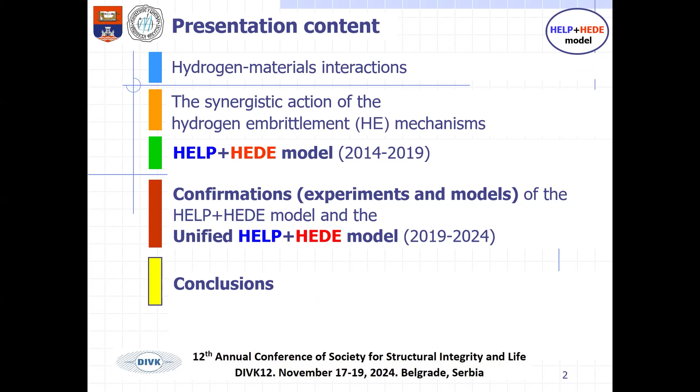So the HELP plus HEDE model is the main topic, and we will talk about synergy of mechanisms of hydrogen embrittlement in metallic materials. Presentation content: briefly about the problem. Then I will present the initial HELP plus HEDE model proposed by a group of researchers from Serbia in 2014 and 15. And then I will present the new results regarding confirmation, experiments, and models of the so-called unified HELP plus HEDE model. And then finally some conclusions.

Here is the overview from our review paper from 2019 about what should be done and what's the problem related to hydrogen materials interaction, generally speaking. We have four topics. One is phenomenology of hydrogen-related degradation, which is an extremely complex topic. The other problem, particularly related to hydrogen new technology and transportation of hydrogen mixture with gases or pure hydrogen in pre-existing pipelines, is hydrogen entry and source, how hydrogen enters into material. And finally, what is missing right now is a structure integrity model and predictive maintenance model to check how materials will behave under hydrogen embrittlement.

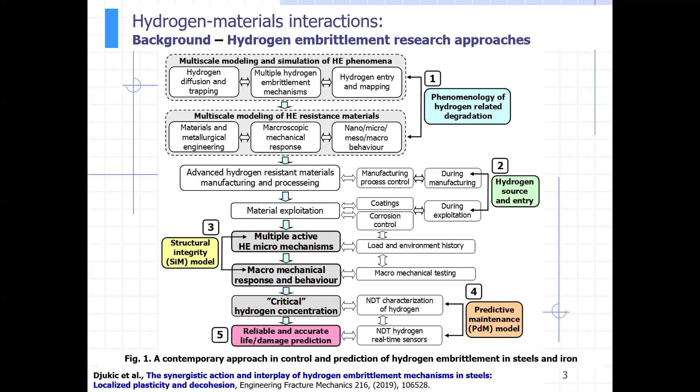And we proposed in 2015 a structure integrity model based on multiple active hydrogen embrittlement micro mechanisms, based on measuring and following the change of hydrogen concentration in material, based on critical hydrogen concentration. And we are still working on a so-called unified predictive structure integrity model for prediction of behavior of material exposed to various hydrogen damage mechanisms.

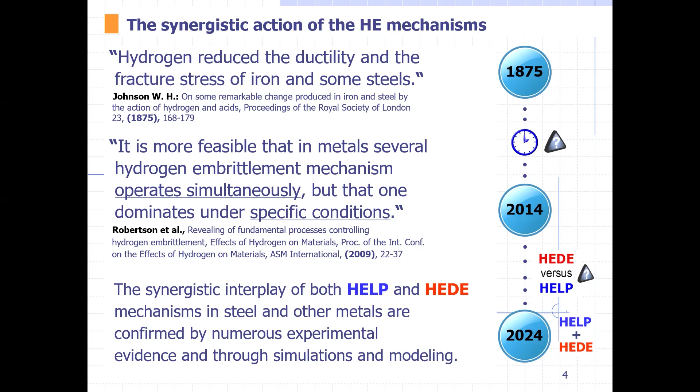Hydrogen is an old topic. In 1875, hydrogen reduced the ductility, Dr. Johnson, famous paper. Then we have in 2009 a paper by Professor Robertson from the US, which pointed out that several mechanisms of hydrogen embrittlement operate simultaneously. And then we proposed the HELP plus HEDE model as one of the options for synergy. So we can say nowadays that the synergistic interplay of various plasticity-mediated hydrogen embrittlement mechanisms, including HELP and the decohesion mechanism HEDE, are confirmed by numerous experimental evidence and through simulation and modeling.

So we have two models for the synergy, and here is the difference. The HELP plus HEDE model proposed in 2014 and 15 pointed out that multiple plasticity enhanced hydrogen embrittlement mechanisms, HELP, but also others, there are various mechanisms, together with the decohesion mechanism, are responsible for hydrogen embrittlement in steel. And recently it is confirmed that this model is applicable to almost all metallic materials.

That is the difference from the so-called HELP-mediated decohesion model proposed by a group from Urbana-Champaign, Professor Robertson and Sofronis, which pointed out that initial activity of some plasticity-mediated mechanism, particularly HELP, is a prerequisite for eventual activation of decohesion as a final failure mechanism. And we show that it's not always the case, particularly at a very high concentration, higher than the critical hydrogen concentration.

So the HELP HEDE model is a comprehensive concept on which several teams, as I presented, now work worldwide to confirm as a unified theory about hydrogen embrittlement in metallic materials. So HELP and other plasticity mechanisms together with HEDE synergistically are operative. And this HELP HEDE model is based on very careful microstructural mapping of the dominant hydrogen embrittlement mechanism depending on hydrogen concentration, microstructural characteristics of material, and stress strain state of the material in order to reveal the various hydrogen-assisted fracture modes after failure.

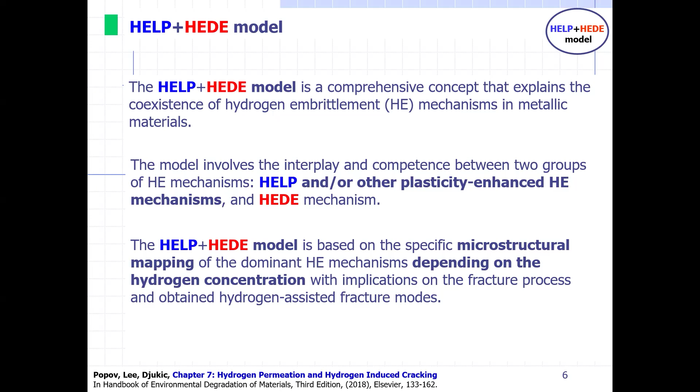So the HELP HEDE model is confirmed in iron, in almost all types of steel, including low carbon steel, high strength steel, martensitic steels, pipeline steel, but recently it is also applied and confirmed that it's operative in nickel-based alloys, aluminum alloys, high entropy alloys, and additively manufactured alloys. So I will give you some new results.

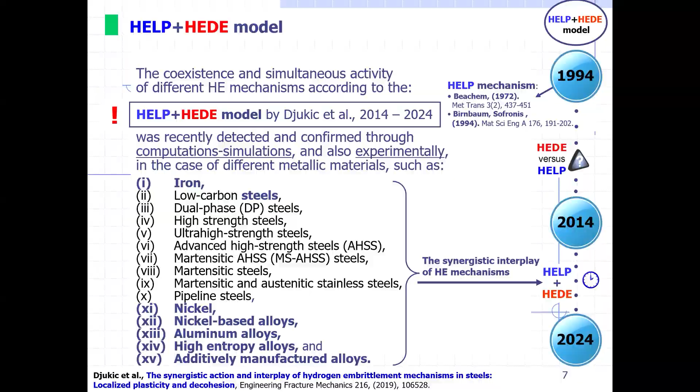Here is the original paper from 2015 in which we proposed the HELP HEDE model. We can see that we have a transition between mechanisms, and the drop of mechanical property, which means particularly ductility, happens not due to hydrogen-enhanced plasticity mechanisms, but due to activation and predominance of the HEDE mechanism, decohesion mechanism. So we have a HELP dominant regime and a HEDE dominant regime, and which is interesting, the fracture features of the low ductility sample and the relatively good ductility sample are very similar. So we have activity of both mechanisms, manifested by microvoid coalescence, a ductile mechanism due to predominance of HELP and other plasticity-mediated mechanisms.

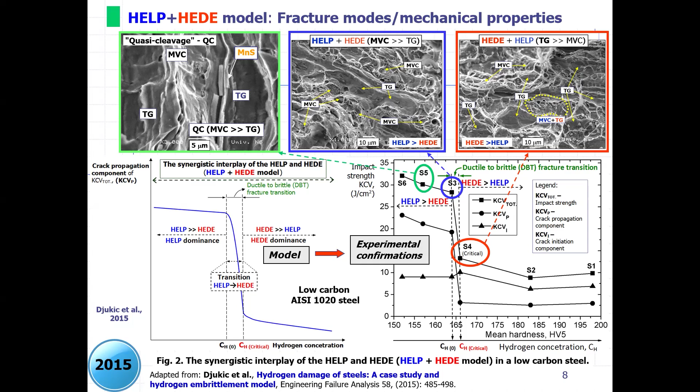And then after accumulation, we propose the local HEDE micro concept, which tells us that when we have accumulation of large enough decohesion incidents, we still have remaining ductility in the material, but we have a predominance of transgranular failed area, and after that intergranular, we have a very sharp drop in mechanical properties, which means a drop in ductility, which finally provokes hydrogen-assisted crack initiation and propagation, and that's the basis of the HELP HEDE model.

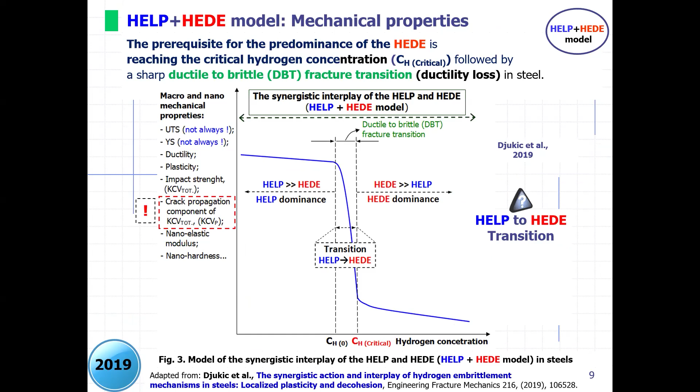So here is the overview of the transition: HEDE dominance, HELP dominance, and we are working on mapping of conditions for activation and predominance of a particular mechanism of hydrogen embrittlement depending on the microstructure characteristics, global and local hydrogen concentration, and stress-strain level.

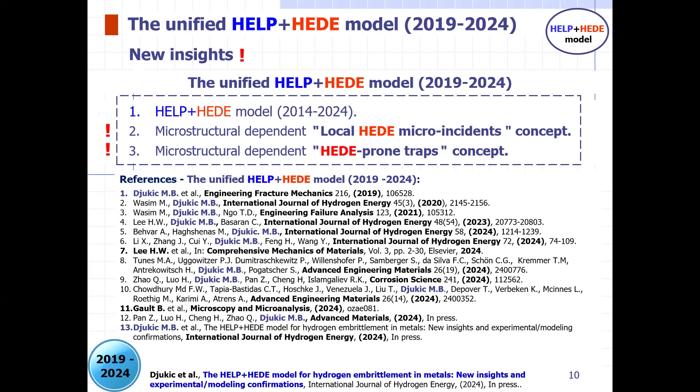And we will talk about the HELP HEDE model. I will present two new concepts, the local HEDE microincident concept proposed in 2019, and the totally fresh and new HEDE-prone concept, which talks about the transition between mechanisms. So here is the overview about critical hydrogen concentration, HEDE dominance, HELP-mediated HEDE, and other plasticity-mediated mechanisms.

As you can see, we can divide, depending on the global hydrogen concentration, the behavior of material into two categories. We have so-called plasticity-mediated fracture modes due to effects of hydrogen, and on the other side, we have pure embrittlement of material, which means decohesion-controlled fracture mode, in which case, which is very interesting and very enigmatic to understand, hydrogen promotes the plasticity of steel and other materials at low hydrogen concentration, so it increases the plasticity of metal.

And after that, it sharply decreases, and that transition is more important. So in the case of HEDE predominance, we have so-called hydrogen-impeded plasticity of material, and we must carefully investigate when that happens in our material.

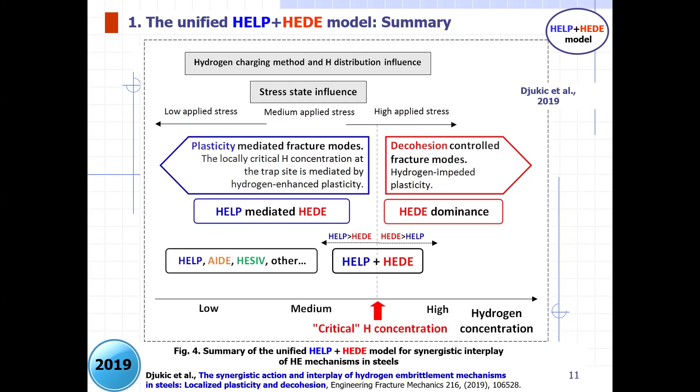So here is the microincident concept, proposed in 2021 with a group of researchers from Australia and Serbia, which tells us that even at a low critical hydrogen concentration, we have localized decohesion phenomena on the microscopic level. It's the so-called HEDE microincident concept.

And in the case of activity of the HELP mechanism and other plasticity mechanisms, we have so-called non-HELP-mediated HEDE, which means that we have a full predominance of the decohesion mechanism after accumulation of large enough local micro HEDE incidents. And in that case, we have HEDE dominance. So we have both plasticity-mediated fracture and local intergranular and transgranular brittle failure due to the HEDE mechanism. So they operate simultaneously.

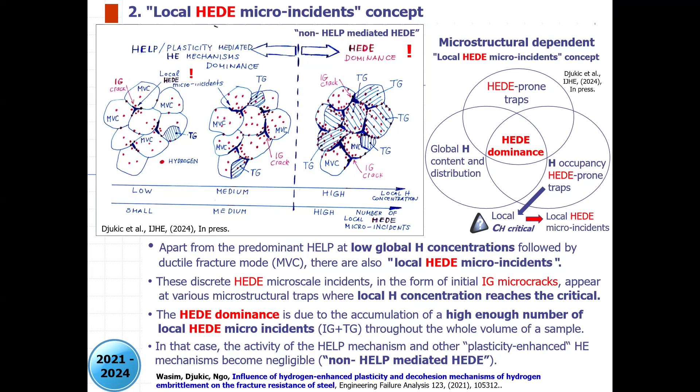After that, here is the overview of local HEDE microincidents, which means that we have initiation of the HEDE mechanism even in the case of relatively low hydrogen concentration in the material, and after accumulation of large enough HEDE microincidents, we have, microscopically speaking, the transition from ductile behavior of material to pure embrittlement, which means a sharp drop of ductility of material after accumulation of that mechanism.

But this is a continuous process, and we must map and investigate when HELP and other plasticity-mediated mechanisms are predominant and when we have a transition to the decohesion HEDE mechanism. I don't have time to explain the HELP and HEDE mechanisms, but they're very well known in the literature.

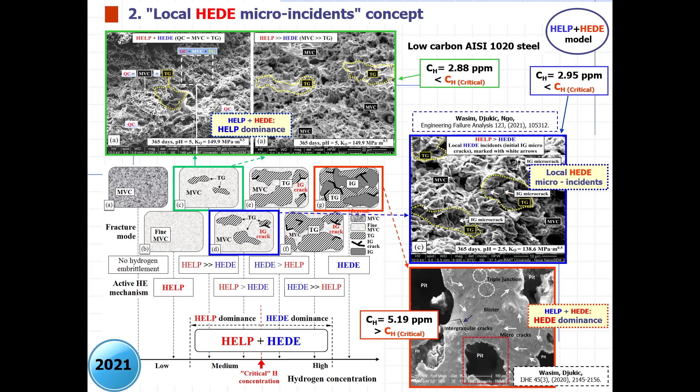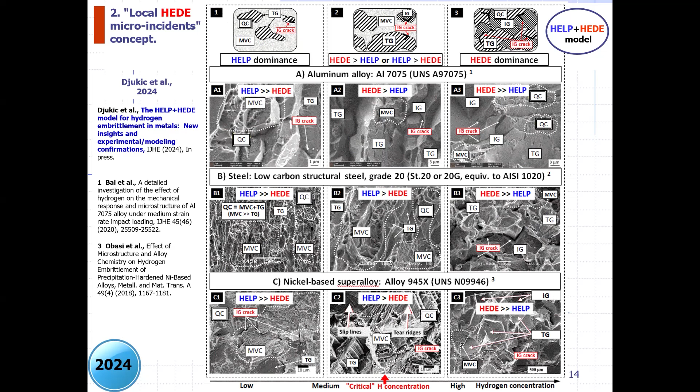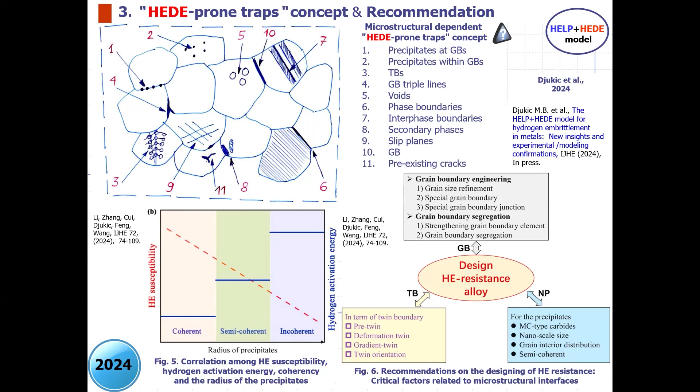So we proposed in our recent paper from 2024 with Chinese authors a design of hydrogen embrittlement resistant alloy based on careful engineering of twin boundaries, precipitates, and boundaries in metallurgical design, in order to ensure that precipitates are particularly good ones, semi-coherent with the matrix. So we must be careful, and on the other slide we will see how high-strength precipitation-hardened high entropy alloys are very prone to hydrogen embrittlement because this schematic is not involved during the design of those particular alloys.

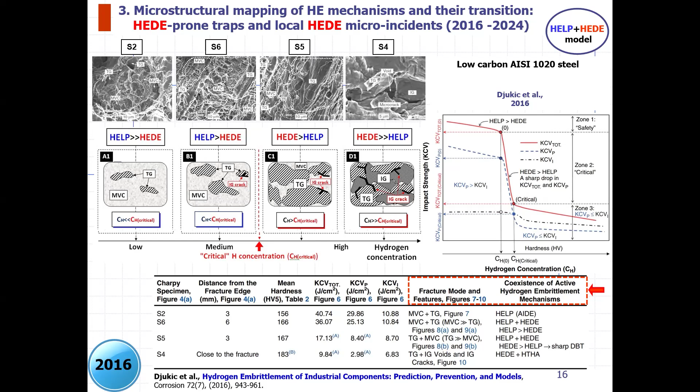This is the structure integrity model. I don't have time to talk about the transition from 2016, published in Corrosion Journal. As you can see, we have a transition of mechanisms, and we have an analysis of critical hydrogen concentration and particularly prone parts of the microstructure. This is the brand new result.

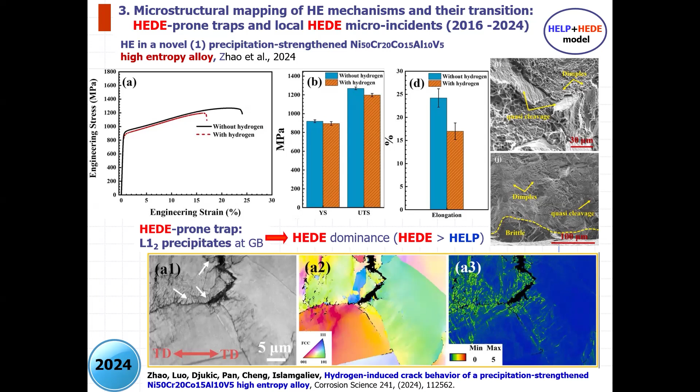And as you can see, we have decohesion and activation of the HEDE mechanism on the grain boundary, which are strengthened by these precipitates. So this particular precipitation strengthening high entropy alloy is very prone to hydrogen embrittlement due to the existence of HEDE-prone precipitates and their location in the microstructure. You must carefully provide the metallurgical engineering of high hydrogen embrittlement resistance alloys. And we show how to do that in nickel-based alloy.

Here is, again, work with a group from China and Serbia. As you can see, we provide a very high resistance of nickel-based alloy. Nickel-based alloys are typically very prone to hydrogen embrittlement. We provide the explanation based on the HELP HEDE unified model of what's happening in this material. But what's very interesting is that we introduce deformation twins and microbands into the microstructure of the novel nickel-based alloy, which, as you can see, provides a combination of decohesion and micro-voids. Micro-voids means that we have remaining ductility of our material.

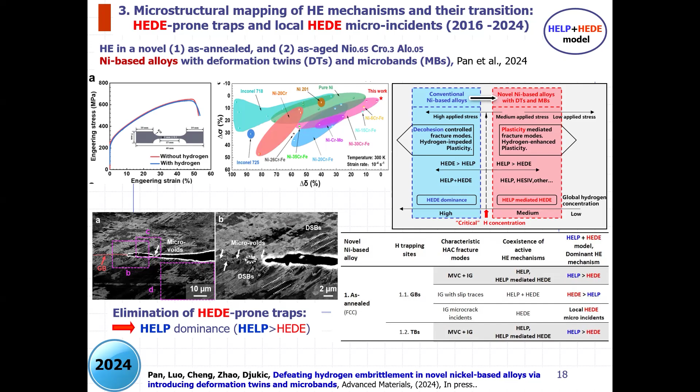So we are in the part where we don't have HEDE dominance, so we shift from conventional nickel-based alloy to novel nickel-based alloy, the active mechanisms below the critical hydrogen concentration. We provide a detailed analysis, as you can see here, in comparison to Inconel 718 and Inconel 725. These are conventional nickel-based alloys as well as other nickel-based alloys. The degree of hydrogen embrittlement susceptibility of this novel alloy developed in China is much lower, and this nickel-based alloy provides very high hydrogen embrittlement resistance. That's the direct approach and confirmation of the micro HEDE incidents and HEDE-prone concept, which I previously explained to you.

One slide more in order to confirm the mechanisms. Together with Professor Basaran from the University of Buffalo and a colleague from China, we provide a very comprehensive paper, in which we tried using unified mechanics theory, which is an entropy-based ab initio method, to confirm the validity of the HELP HEDE model on the physics level, on a fundamental level. And we have some very promising results.

We implemented the HELP HEDE model and transition between mechanisms in the case of high cycle fatigue of pre-hydrogenated material, and confirmed that due to HELP HEDE activity, we have a shortening of fatigue life, as you can see here on the diagram. So the simulated stress versus the number of cycles fatigue curve due to HELP HEDE activity at different hydrogen concentrations confirmed that when we increase the hydrogen concentration, we have a much larger increase in entropy because of the HEDE mechanism, and the lowering of entropy due to the HELP mechanism, which is a direct confirmation of the HELP HEDE model on the ab initio level. Professor Basaran has been working for more than 30 years on unified mechanics theory.

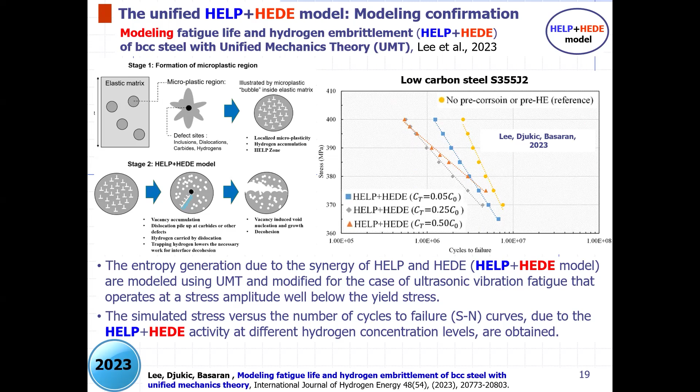So, some of the conclusions. I tried my best to give you an overview. It's a very complex topic, and I'm aware that it's not easy to present the results, but what's important is that we still don't have results which will finally confirm the hydrogen embrittlement mechanism. We need microstructure mapping techniques, atom probe tomography, and other techniques.

We also published a paper with authors from Brazil and Austria, in which we pointed out that in order to solve the problem of hydrogen embrittlement, we need to confirm these hypotheses of mechanisms, because all these mechanisms, HELP, HEDE, are well known but still not confirmed at that level. To see that when you have a high hydrogen concentration, you need to map the hydrogen distribution in the microstructure, and then measure the local hydrogen concentration and show that we have high, medium, and low hydrogen concentration. There is a big problem how to do that.

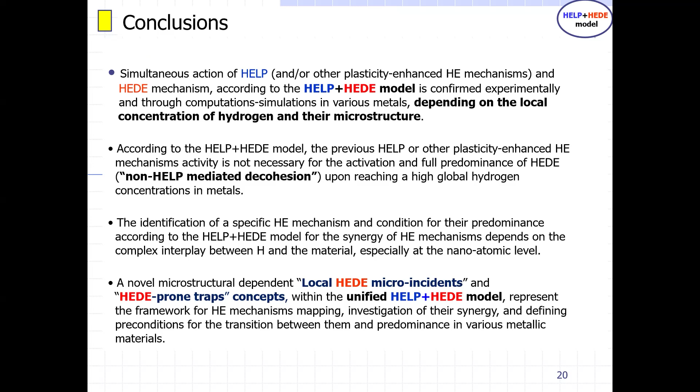But the novel microstructure-dependent local HEDE micro incidents and HEDE-prone concept within the unified HELP HEDE model represents the framework for hydrogen mechanism mapping and further investigation of their synergy, and defining what is very important, the precondition for the transition between them, which means when we can safely use components exposed to hydrogen embrittlement and when they will fail in a brittle manner due to HEDE predominance. So, you know, hydrogen embrittlement is a typical brittle failure which happens immediately, and it's very dangerous.